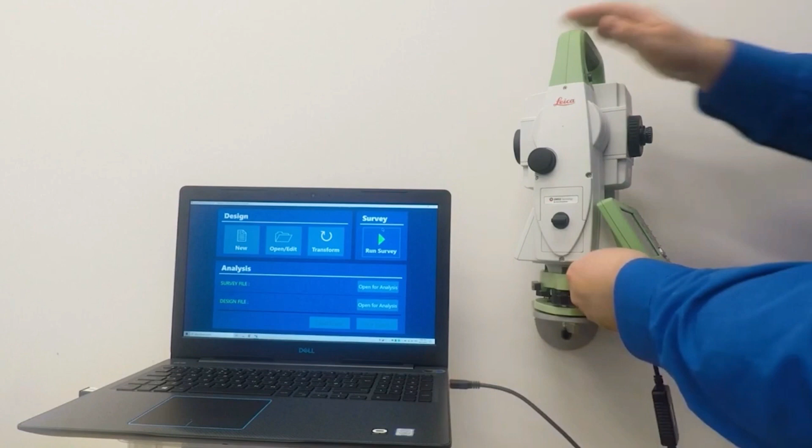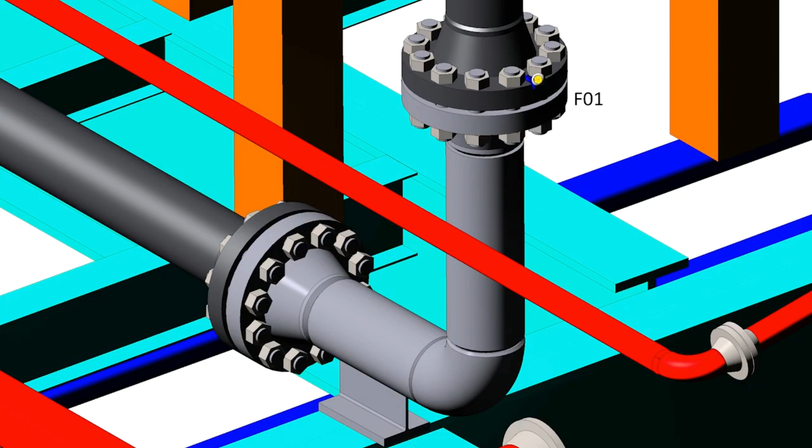Firstly, a preliminary design is manually entered into the system or imported from an isometric file. This design includes the pipe component specifications and the approximate geometry of the spool to be duplicated. Using this preliminary design, we perform a survey of the actual spool to be replaced. This survey can be taken on-site while the spool is still installed, or after it has been removed.

The survey can even be taken without the spool being present at all by surveying the flanges the spool is to mate with. More information on the survey process can be seen in our video about pipework replacement, which we'll give you a link to above.

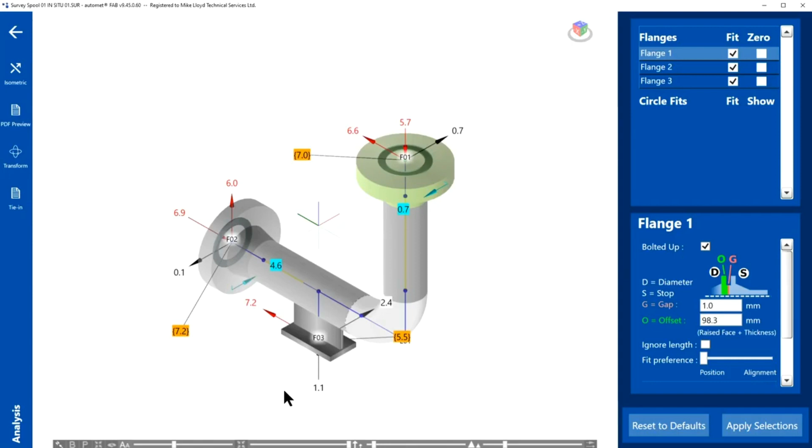The survey results are presented in the software as positional differences from the preliminary design. This orange number specifies the surface misalignment in millimeters, and the blue number is the flange rotation error, also in millimeters. These positional differences then have to be reoriented in order to make it easier to produce a matching design.

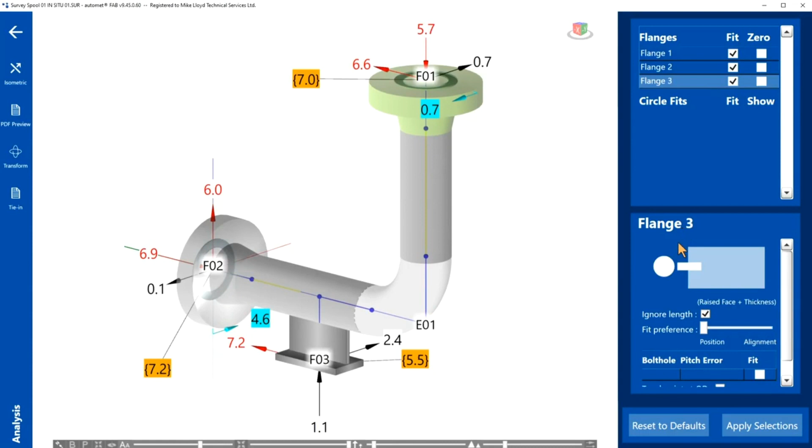There are a number of factors that might influence exactly how this is performed, but it's best to keep everything as simple as possible. For this example, the fit preference on the support is set so that its base is flat level. Flange 1 and flange 2 are then oriented so that they are exactly in plane. Notice the base is still level. Finally, flange 1 is set so that the positional differences are 0, so it can be used as the origin point of the design.

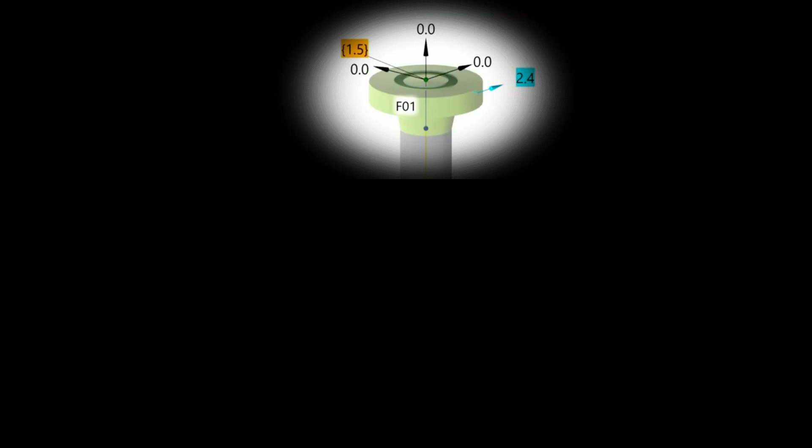Now, the preliminary design can be modified using the survey as a reference to create the final deliverable. Firstly, the flanges are repositioned by using the pipe length editor until the coordinates match the survey. Optionally, the flange alignment and orientation can then be corrected by changing the azimuth, zenith and rotation of each flange. This is often required to exactly match a survey taken on site.

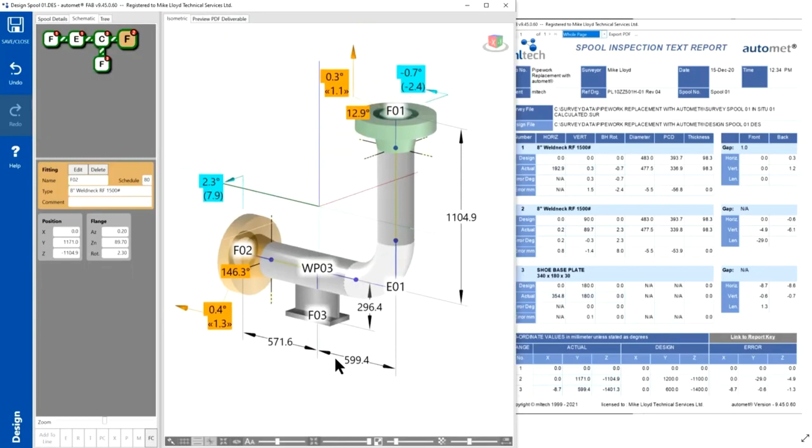Finally, the design is checked against the survey by running it back through the analysis step to ensure the positional differences are close to 0. The final deliverable drawing can then be exported and printed, alongside its bill of materials, and used to fabricate an exact replacement for the original section of pipework.

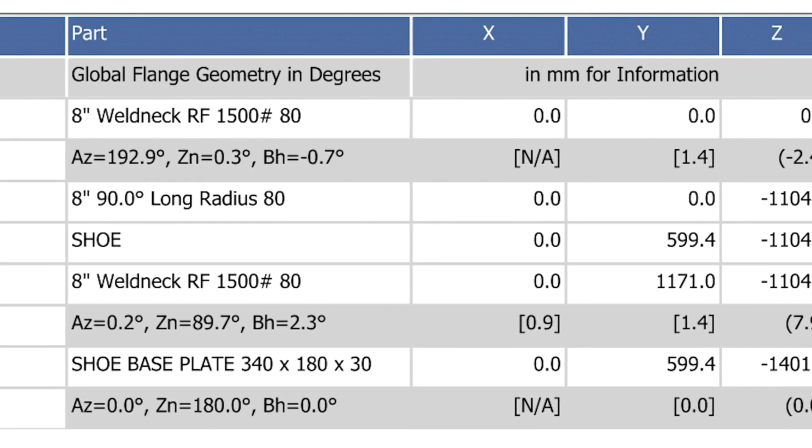The entire process is very quick and easy to perform with a minimal amount of training,